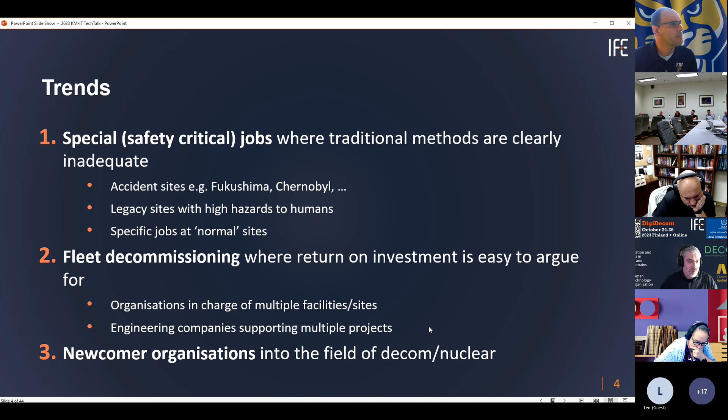We do see a lot more investment in the application of robotics and digitalization in larger organizations, where they see that these systems can be reused in several places, several reactors. But newcomer organizations are also quite interested in these innovative concepts because they see it could help them do things safer.

As I said, it was a bit before, and this is something that is changing. It was a bit more specific objectives for specific tasks, where we saw that digital concepts were applied mostly.

One of the most prominent applications was facility configuration management, and this is where we started talking about BIM, building information management concepts, and later at the IAEA we also used the name PIM, plant information management. There's an increasing number of examples looking more into integrated solutions.

I do see a movement away from really big solutions - some big companies offering all-purpose solutions, including 3D model-based, BIM-based solutions that do everything for you. There's an international trend now to move away from those and establish modular concepts, where different modules can be offered by different vendors and organizations, and the trend is to make these different modules talk together.

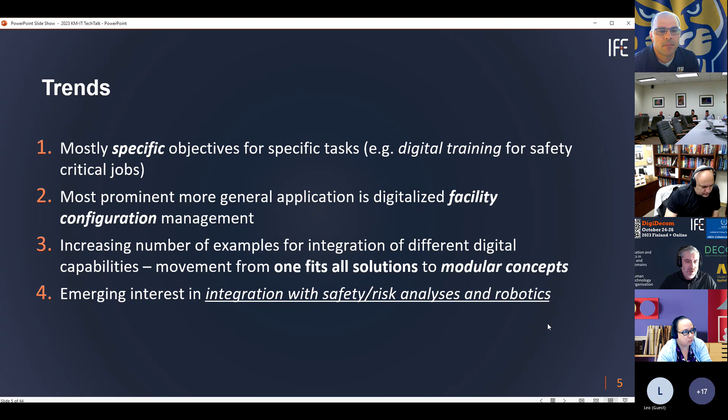There's more and more interest in combining all these technologies - combining digital concepts with concepts that ensure safety, risk analysis, and also robotics. This is how we established our lab called Hadron.

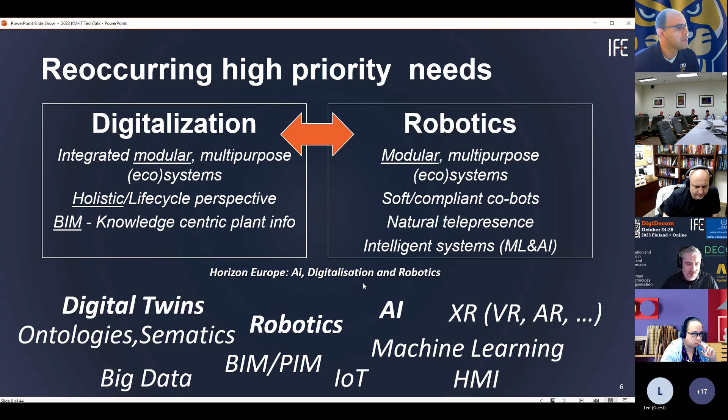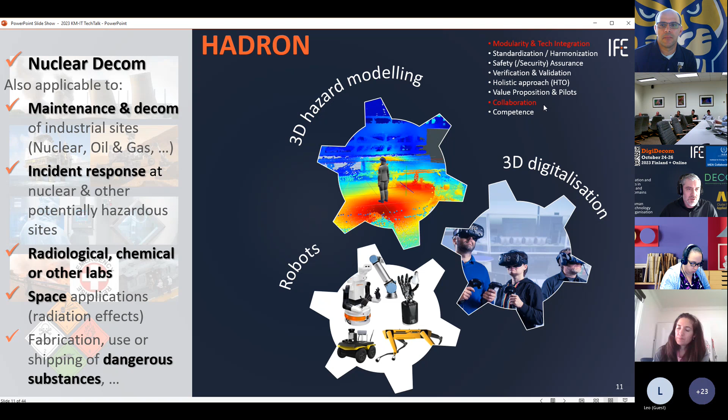By default, since we're looking at all these application areas and the integration of these technologies, we are very much addressing modularity, technology integration, and collaboration between all these industrial areas.

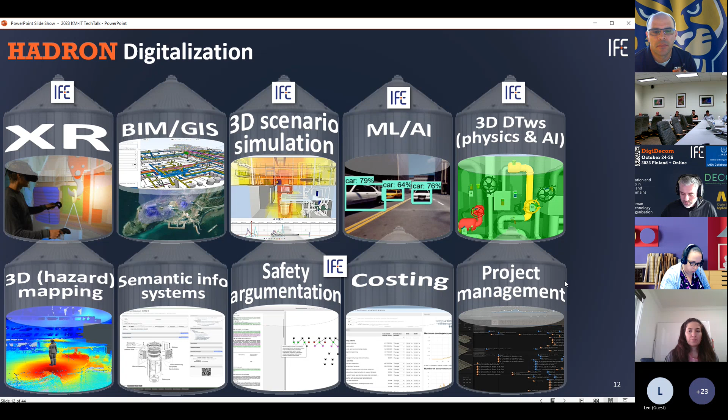On the XR, extended reality front, a very important thing that we have been doing the longest, probably, to make these XR applications applicable for nuclear decommissioning and nuclear in general, is to combine them with a library of radiological modules that is capable of analyzing the radiological risk and visualizing the results in an easy to understand way, for instance, visualizing radiation for the people.

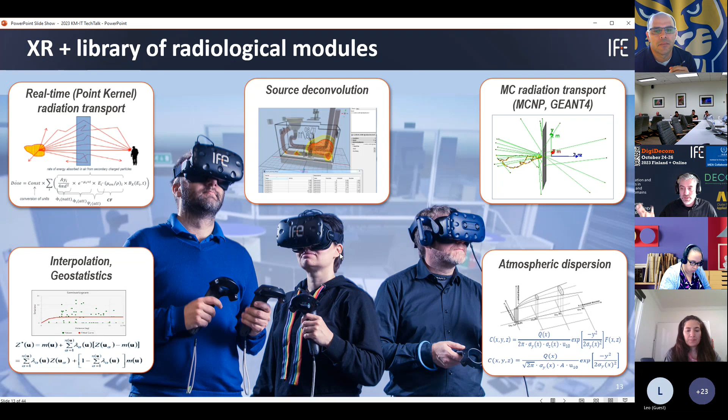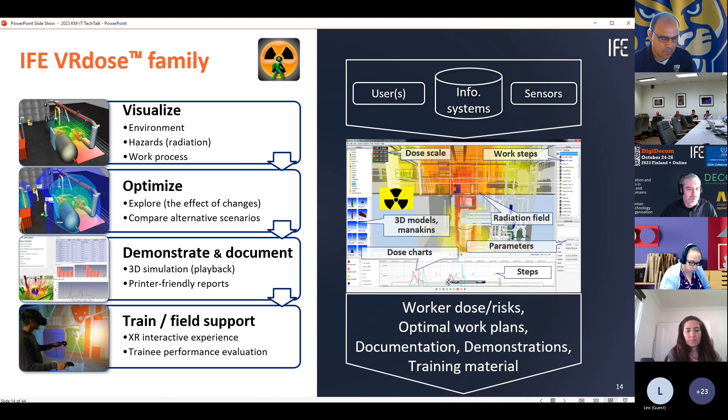There were several projects, several sites since 1999. We have actually been working quite a lot with Russian sites, especially since they were very close to the Norwegian border, and these were sites that were not in a very good shape. We have been working and still working with Ukrainian sites, and we have been working with quite a lot of other sites as well.

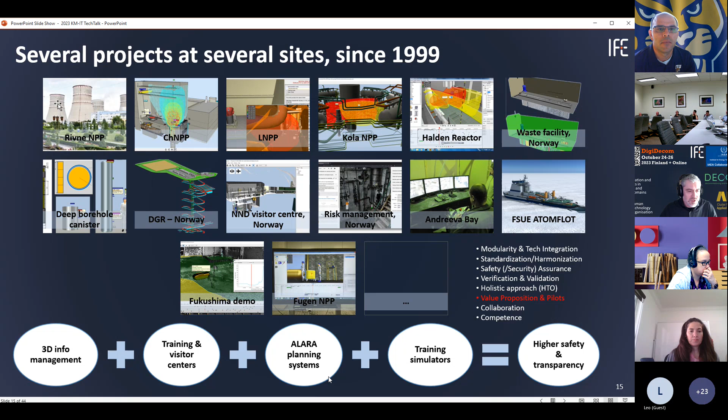And of course, now we are also working quite a bit with the Norwegian problems. Ultimately, these projects were about 3D information management, establishing visitor centers, training centers, systems for ALARA principles, and training simulators.

And then what we had been starting to work on is how to integrate all these different concepts, because we did realize that, yes, XR is very important, people really want to apply those; BIM technologies are very important; radiological risk assessments are very important. But ultimately, what people want is a more integrated capability rather than thinking about all these things separately, and then think about how to integrate these.

So we looked at a holistic approach from a functional perspective, and I looked at what are those key capabilities that you need to work together for supporting a nuclear decommissioning project. This is the result that we came up with, including costing, project management, facility configuration management, and so on.

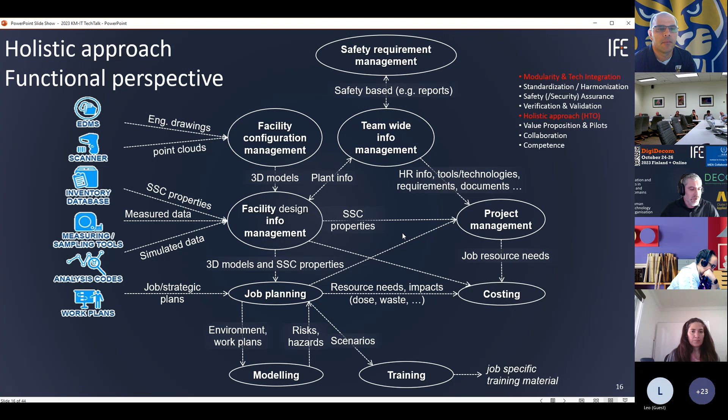And then we translated it into a data system perspective, and we said, okay, for facility configuration management, then you typically use the 3D modeling and the BIM models. For the planning, you can use job planning systems, project management systems, and costing systems for the costing.

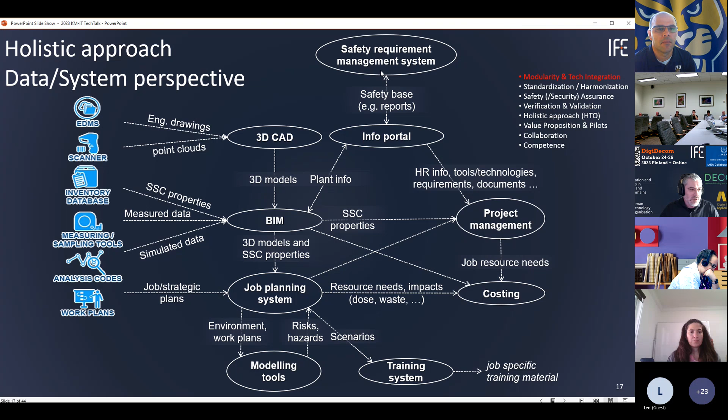And these all should be able to work together because you need all of these functions. For instance, project management would have to have a lot of input from the facility configuration management for the work planning and so on. So basically, these systems have to be able to communicate with each other.

And the input to these systems, this was actually something that we realized quite early on, that yeah, these systems, once they are up and running, they are great, but how do you establish this system? How do you make sure that you have all the 3D data, the input that are required to establish these systems? And then, of course, there has been a lot of advances in systems like 3D LiDAR scanning.

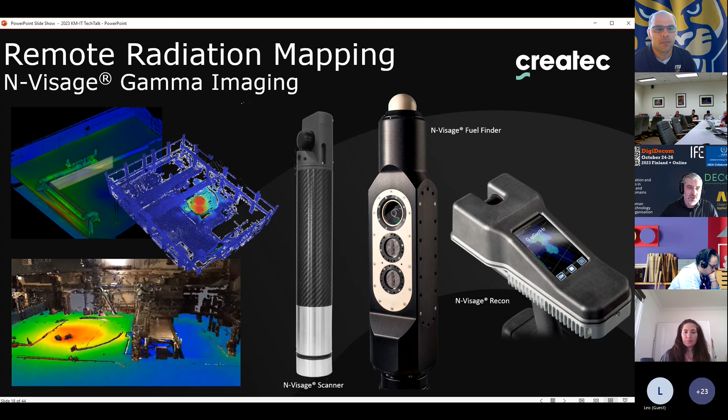But also there are systems like this one that we have been working quite a lot with from Createc, where the 3D laser scanning is combined with gamma scanning as well, and thereby it can emulate the functionality of a gamma scanner, but also directly provide information in 3D. So basically, it provides the 3D model attributed with those activity values.

And then, okay, what we said is that if you have that input from these systems like the one from Createc, then you can integrate these with systems like the RadPIM, which we created at IFE for radiological characterization, the VRdose that can simulate decommissioning waste management scenarios, the simulation editor, which can then turn these scenarios into interactive training modules, and additional modules like InStrucT and ColaRis for risk management and for safety demonstration and argumentation.

And then, of course, at the core of these is the BIM concept, which we did, and there's a lot of tools already on the market for building information management, and rather than replicating these, what we said is we take advantage of those that are existing in the market.

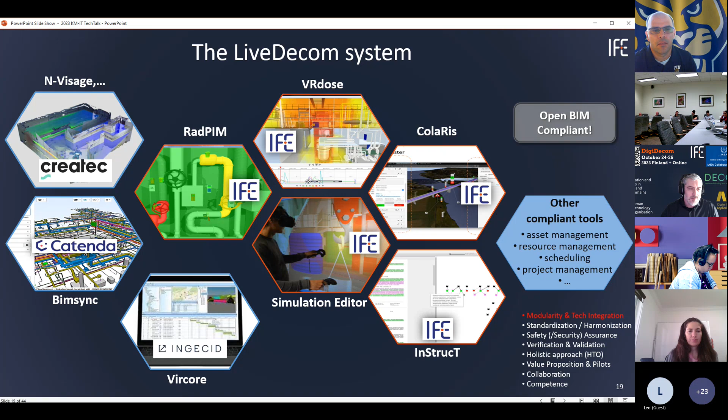For instance, the BIMsync system developed in Norway, or the Vircore system developed in Spain. We build around those rather than repeating the BIM technology. We extended it by all the functions required for the nuclear industry, specifically for decommissioning, thereby achieving an open BIM compliant system that follows the open BIM IFC standards.

This makes it compatible with any other system that follows the same standard. So this is how the architecture for this integrated system looks like, taking input from LiDAR and 3D gamma scanning systems, but also any kind of characterization data, typically point clouds or activity point clouds. It goes into a point cloud tool, converting it into the right format so you can use it for characterization, risk information management, planning, and training. Then the output of each of these tools goes into a converter that stores the results in an IFC database, in IFC format, a standard format.

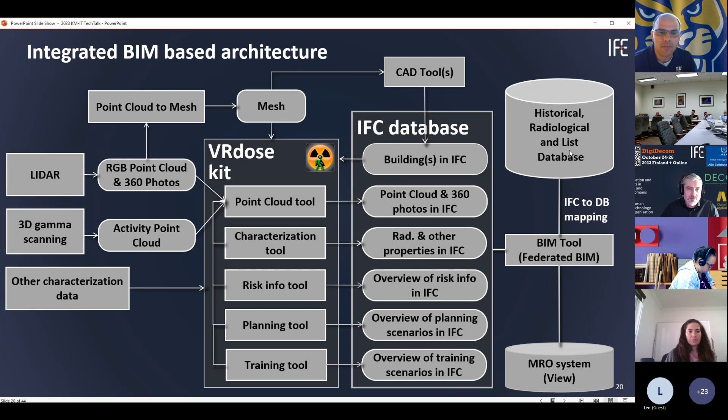Then the front end to this would be a BIM tool, a federated BIM that allows the user to look at all of these entities, the point clouds, the radiological properties, the risks, an overview of risk, and so on, all in an IFC format. This can also be combined with historical, radiological, and other databases and MRO systems.

One project that specifically looked at some aspects of this was the PLOG project. Here, we converted 3D models achieved through 3D scanning into IFC models. We did the same with radiological visualization. Here you see radiological visualization in one layer. The yellow is high radiation, and the more purple-blue is the lower radiation, but this is now converted into IFC format.

The same with the activity point cloud. We also tested out how to segment this IFC point cloud, converted into IFC format, without having to turn it into a full-scale BIM model.

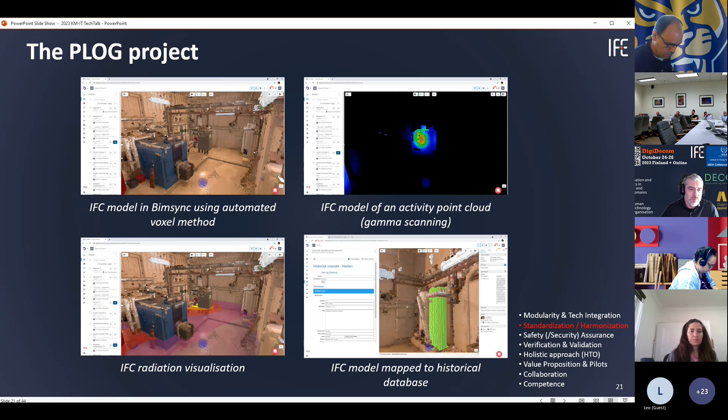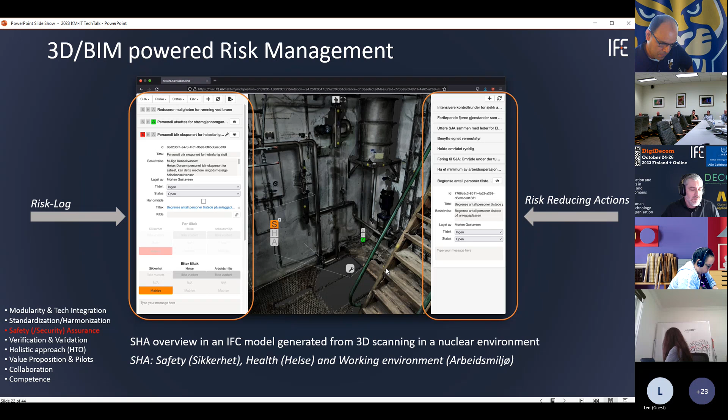They can all be associated with risk-reducing actions. You can go through the risks recorded for certain points, environments, and components, and manage the actions in response to these risks in a 3D format that only uses a 3D point cloud as input.

We have been working from quite early on about safety cases. A safety case is basically just a structured way of demonstrating safety. Typically you have PDF or Word type documents describing your assumptions, your arguments about why the work you are doing is safe, and your evidence that this is true. Of course, in this kind of linear format, it's not so easy to follow.

So what we tried to see is, can you convert it into a more graphical format where you see the decomposition of this argumentation from high-level arguments to lower-level sub-arguments, and then from each of these arguments you have connected evidences and comments, so you can follow through this tree for your whole argumentation process.

Each of these nodes can be connected to a certain paragraph or part of the text in one document or another, so you can use this concept as a document management system with a specific way of organizing information, in this case related to safety argumentation. We also prototyped that each node could be connected to a certain point, time, and component in a 3D model of your facility.

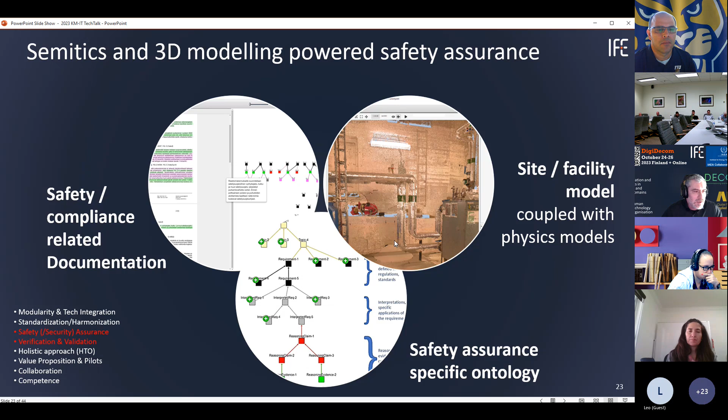And this is an ontology, basically a way of organizing your information. In the Pleiades project, which is a European Commission financed project, we looked much deeper into ontologies, into what should be a standard way for organizing knowledge and information in the nuclear industry, with a specific focus on nuclear decommissioning and other large projects.

This was one of the first steps in this project, and this is just one picture. There are all these categories with a larger frame around them, and they have subcategories, but otherwise this is the top level ontology that we ended up with. This is something we would like to propose in collaboration with the International Atomic Energy Agency as an international ontology.

For representing nuclear information related to any nuclear projects, you have all these high-level categories of decisions and costs, and subcategories for at least these, which can of course be further subdivided.

And what you see here is that, rather than reinventing the wheel, we have SSCs that are components in a facility that can be very nicely represented in IFC, in BIM, the standard BIM format. Rather than reinventing that, we are building around these, adding all those categories that are not necessarily represented, or not represented in the way that it should be for the nuclear industry.

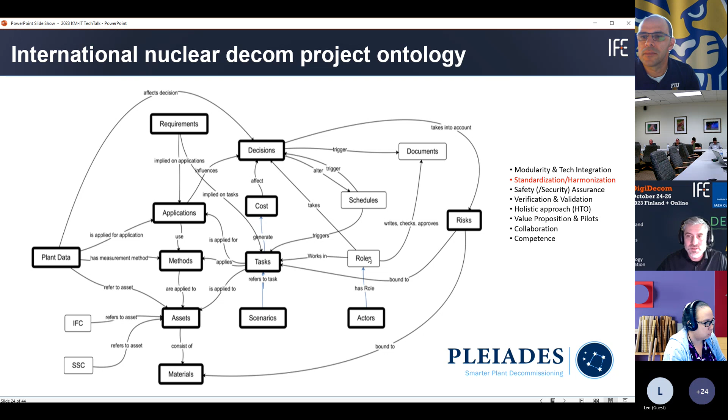One important activity where we would like to take advantage of this international ontology is the technical working group on new and emerging technologies to advance decommissioning projects, where Leo is also a member, so we're working together here as well. There's a subgroup called Management of Legacy Data.

One of the challenges we're trying to look at is that there's a lot of information when it comes to nuclear decommissioning. It's not so much a problem of lack of data, but there's all this different data in different formats, and it's very difficult to see what your essential data is, what you should really focus on because you need it for decommissioning, and how to extract that essential data set from all this sea of different documents in different formats.

The mandate of this group is to investigate current and emerging tactics for composing an essential data set that is correct, complete, and structured, by analyzing and mining legacy information useful for decommissioning. Natural language processing, for instance, would be a very important tool we'd like to use. But this would be very heavy about structuring information, and since the Pleiades project has already proposed an international way of structuring information, we would like to follow that structure here.

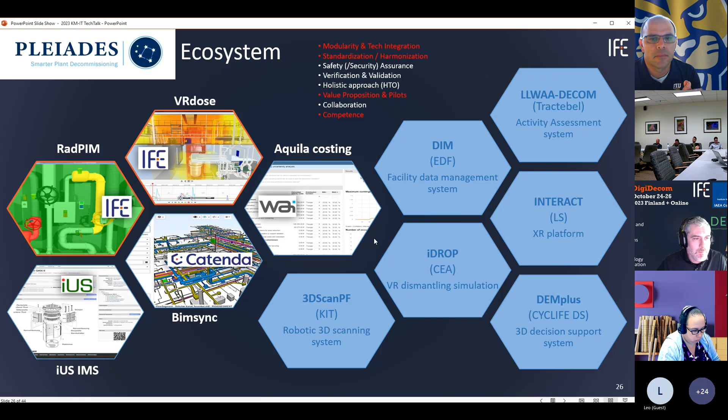There's a lot of people involved in this project. IFE is one of the members. It's led by CEA from France.

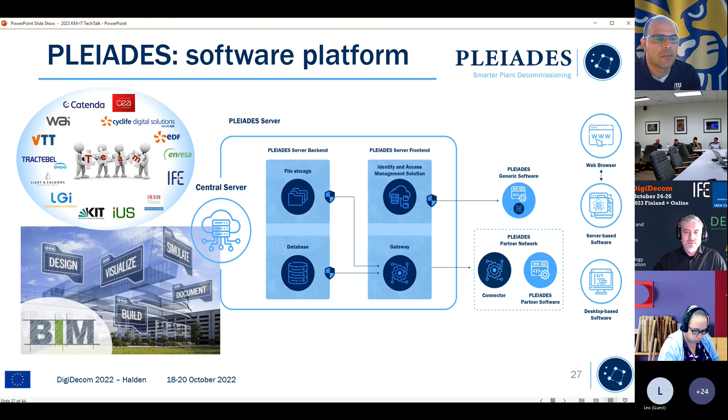There was a lot of work, actually much more than the development of the ontology itself, about how to turn this ontology into something technical that can create a central server where all the tools can tap in and exchange data. Since the data is in very different formats, from radiological measurements and material properties all the way down to point clouds, scenarios, and safety cases, it was a big challenge to represent this data in a common way so that all these different tools can take advantage of the same data pool.

Another very important project here is the PREDIS project, which focuses on predisposal of radioactive waste. It's somewhere in between Pleiades and EURAD, where EURAD focuses on disposal, Pleiades focuses on decommissioning, while PREDIS focuses on what happens in between. A very important task for IFE was to develop a decision platform supporting the predisposal management of radioactive wastes.

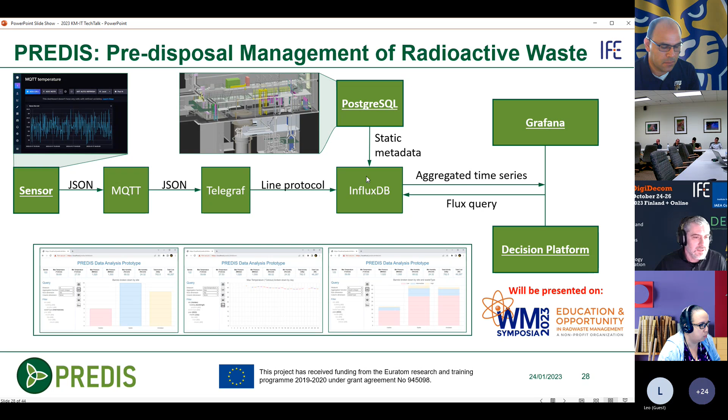Typically, this kind of information can be used for waste routing, where you have the source, represented in BIM systems, supported by characterization tools, going down to different routes until disposal. But factoring in circular economy approaches, this picture becomes more complex, because some of these endpoints - before we were always thinking of as disposal - should be thought of more as a potential for reuse and valorization.

Of course, in order to do that, you need a lot more data, and the picture becomes much more complex, because there are a lot more variations of what to do with your waste. So the potential application of AI-based optimization algorithms becomes much, much higher.

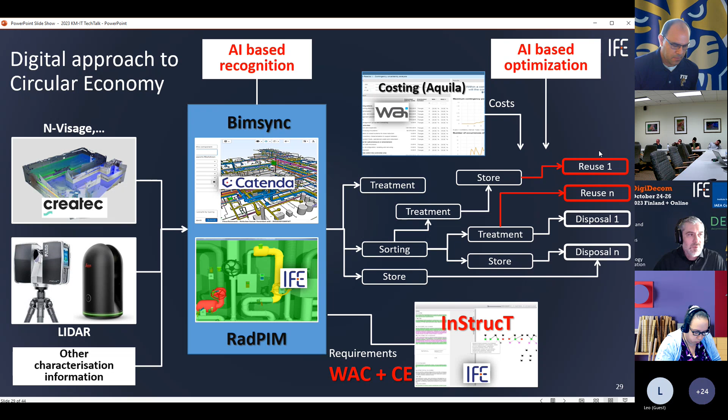Since I talked quite a lot about standards harmonization, one very important project to mention is Harpers, one of the most recent projects started. This is the only project in the current ongoing Euratom program, in the last Euratom call, referring to decommissioning and waste management. It's about harmonizing processes and regulation standards in waste management and decommissioning.

The starting point of the project was the different national regulations that hinder broader markets, which I mentioned earlier - the slow adoption of new technologies due to regulatory differences between countries, low use of recycling for the same reason, and a risk of negative public perception related to environmental sustainability issues. The project aims at addressing these issues, clarifying the benefits and added value of more aligned and harmonized regulatory practices and standards in decommissioning and waste management, while also identifying obstacles preventing implementation of a more common regulatory framework.

Ultimately, of course, the project would enhance the overall safety and economics of the nuclear sector. This project actually does quite a lot of things it will address, including the harmonization and the difference between the regulatory processes in general between countries.

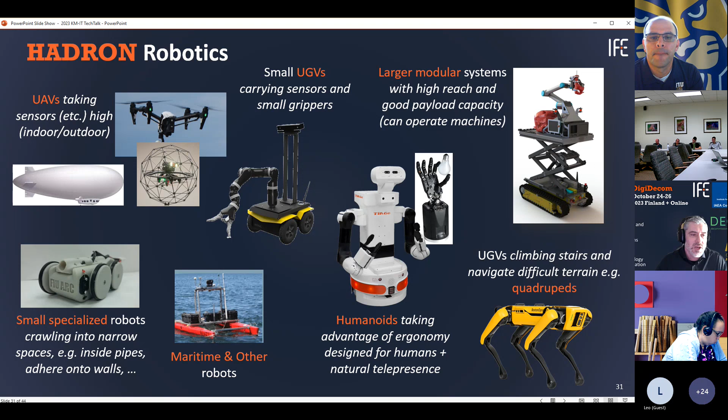But we also see more and more humanoids appearing, with more applications. We have been working with this humanoid, and another one actually, in our projects, but also with larger systems that can operate higher payload and lift things much higher. They have a place. So ultimately, this is what Hadron is about.

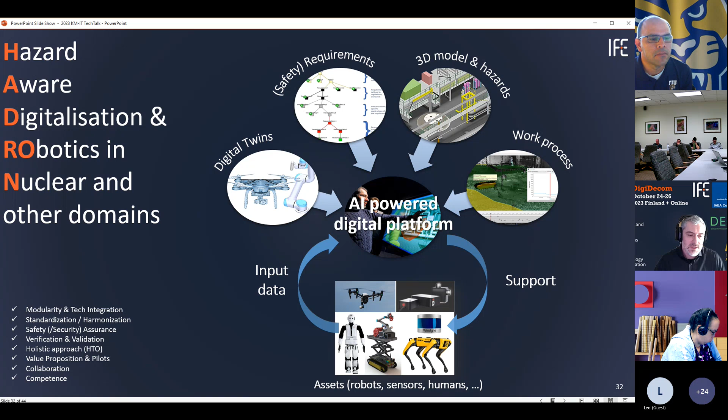I've been talking about digital concepts where you can use digital twins of these robotic assets. You can analyze your requirements and break down your argumentation. You have 3D models of the environment and your hazards, and you have the work processes, ultimately supporting an AI-powered digital platform. This platform can get a lot of input from robotic systems, but also can provide a lot of support in terms of design, training, but also for evaluating the efficiency and feasibility of these systems in specific environments like nuclear environments.

One important project we are running here is the RoboDecom project, where we are integrating mobile robotic platforms with 3D scanning, gamma scanning platforms, and with all these digital concepts I've been talking about. Just recently, we signed an MOU with the company Createc—IFE Createc. Our aim is to establish a new company, so that this kind of integration gets to a higher TRL level and gets access to the market.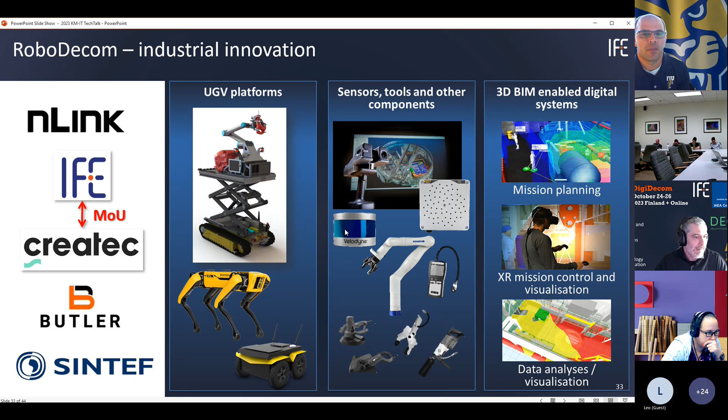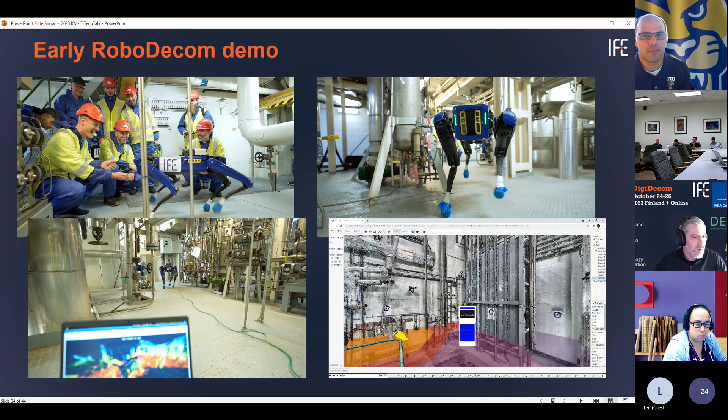In this picture, hopefully they started moving, I hope. This was actually the first time we took Spot into the Halden reactor, and you see here the point cloud being generated by the sensors on Spot. This had to be done on very short notice, so we didn't have time to put all the sensors on Spot, and this was actually one of the very first demos.

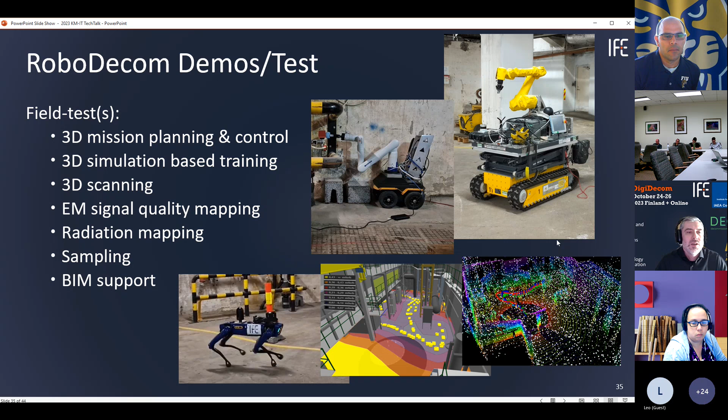We then did a lot more focusing on 3D scanning and how to use this digital concept for electromagnetism—basically the radio signal mapping for robotics, radiation mapping and sampling, and so on. We used both Spot, but also some other smaller four-wheeler platforms, and a bigger platform from a Norwegian robot supplier. Ultimately, this is where we would like to end up.

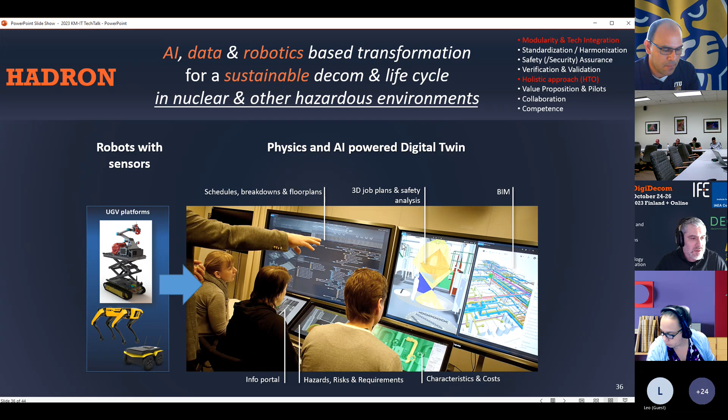We have all this robotics fueling a 3D digital twin and AI-powered physics and digital twin systems, where you can plan your work, analyze safety, and do your characterization. So we have this 3D ecosystem combining all these ingredients that ultimately result in an integrated system.

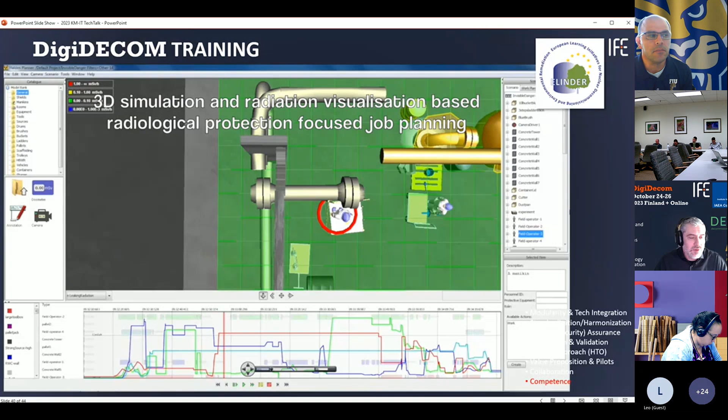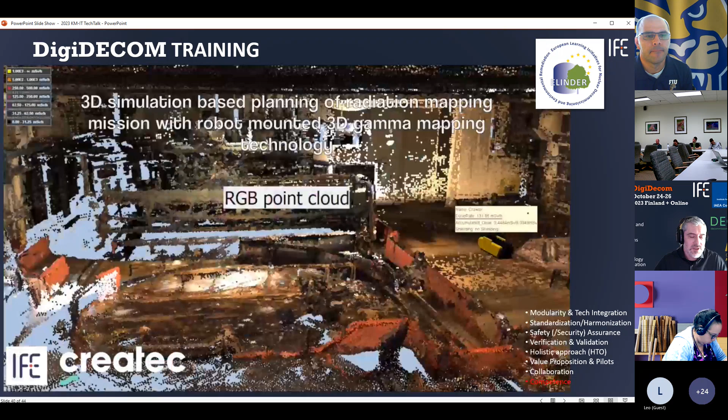One very important thing we are doing both in the IAEA center and this cluster is using digital concepts. A natural output of this is that you have your facility configuration, radiological data, and processes in a very easy to visualize format, which makes it easy to turn into interactive training material. You see some examples we used in our last training course, done on the ELINDER initiative.

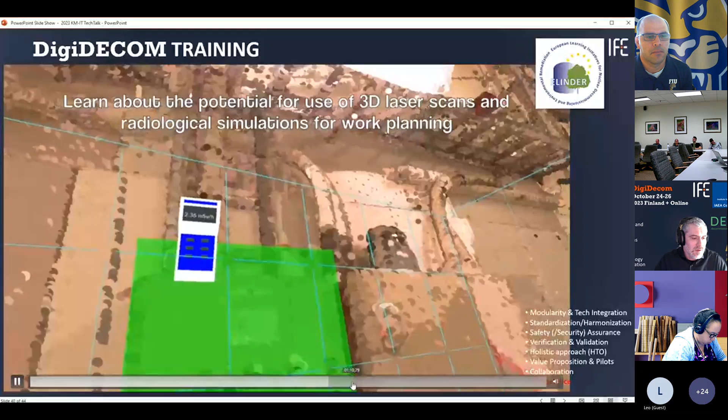This one is from Fukushima. We use this to teach concepts like how to locate radiological sources, allowing you to take people into radiological environments without them having to be exposed to radiation. This is from our reactor, teaching different waste management principles and so on.

We are preparing our new training course now, the DigiDecom training, which we would like to organize this year under the IAEA center. So if anyone's interested, please tell me. Earlier we had Argonne National Laboratory and FIU as partners in organizing these courses, and we hope we can do the same for the next course.

We're also establishing a national center on nuclear now, where this kind of XR-based training concepts will be addressed. And I think this is one of the last slides.

There's a lot more going on the decommissioning side than on the disposal side. This is exactly why we chose the Environmental Earth Sciences journal, because we would like to see a lot more happening on the geological disposal side, where application of BIM concepts has to be integrated with geographic information systems, and the application of these is not as straightforward as in decommissioning.